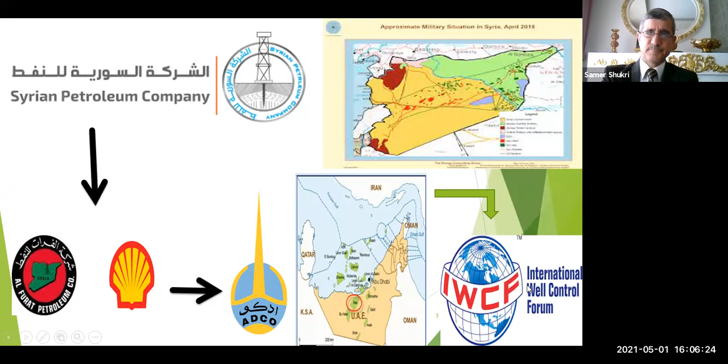Here is the map of UAE, Emirates. I worked here in this circle, Bab Field, Habshan. Then I moved to training, and I am accredited and authorized from the IWCF forum. Here are my certificates as an international trainer, passed, and here also is my result. All are excellent, strong pass.

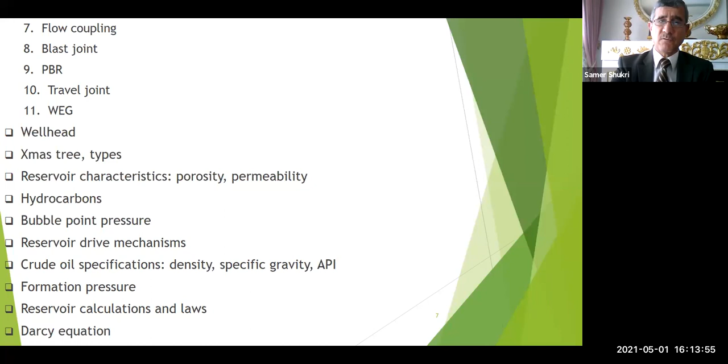So we'll go also to reservoir drive mechanisms. This is reservoir engineering, crude oil specifications. We will go to density, specific gravity, API, formation pressure - I think most of you know what I am talking about. The reservoir calculations and laws, Darcy equation, all of these you are brilliant in, I think. Then initial oil in place, how to calculate the reservoir volume, how much oil is in it, how much fluid we have in it, and the saturation.

We have Boyle's law also, for the gas: P1V1 equals P2V2. I think most of you know this law. Production stage, we will go to well classifications, gas lift system, oil types, well intervention.

So we'll talk about wireline and coil tubing. Then with coil tubing we can do well stimulation, which has types: acidization, fracturing, hydraulic fracturing. We can go to productivity index also.

Then well kill method - this is very important for the IWCF, well control. So if you need to kill the well, you have to be fantastic in these four methods. I will explain all of them to you in detail.

Then we can go to cement plug using coil tubing, well logging - this is a big subject, open hole logs and cased hole logs. Then noise log. I will explain to you also working in H2S environment.

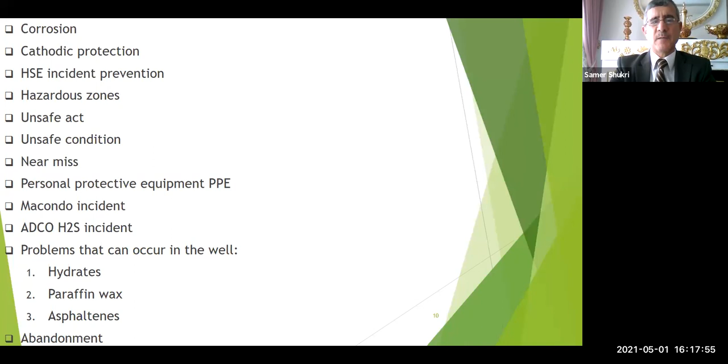Then problems that can occur in the well - we can take hydrates, paraffin wax, asphaltenes, then abandonment. Let's move on to the details of this session, of this small course.

We can say that we have oil in this area. We suspect that there is oil in this area. So how can we identify, how can we prove that this oil will be here? I think you have some idea, but I will go into detail to save some of our time.

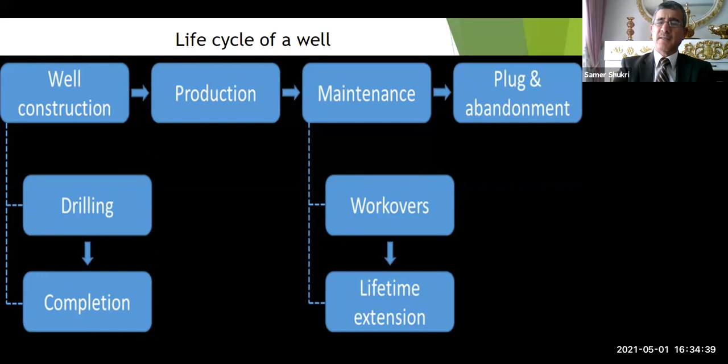Here we can take this: the life cycle of a well. Starting with construction, drilling and preparation take about 18 months, 1.5 years. Then the drilling itself takes 2 to 3 weeks, maybe 1 month, maybe 2 months. It depends on the geological conditions encountered and the depth of the well. If we drill 15,000 feet it will be different than if we drill 2,000 or 3,000 feet. If it is vertical it will be different than if it is horizontal, and so on.

Then we do the preparation. After the rig moves, we do the preparation, or if the rig is already on site. But for the time being, we release the rig. It will run the completion, and we come and do this stage: clean out, stimulation, perforation, frac, logging, all of this after running the completion by the drilling rig. After that, we do the production.

As I told you, production will last 20 or 30 years, plus or minus. It may be 10 years, maybe 5 years. After that we need a workover to come and isolate this producing zone and move to another zone, or do a side track, or convert the vertical well into a horizontal well, and so on. So every well will be different from the other well, and every field will be different from the other field.

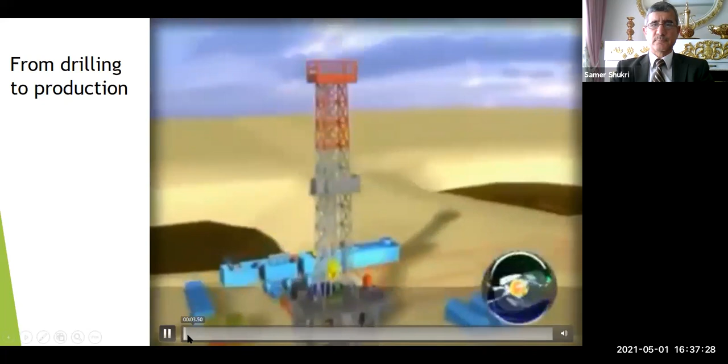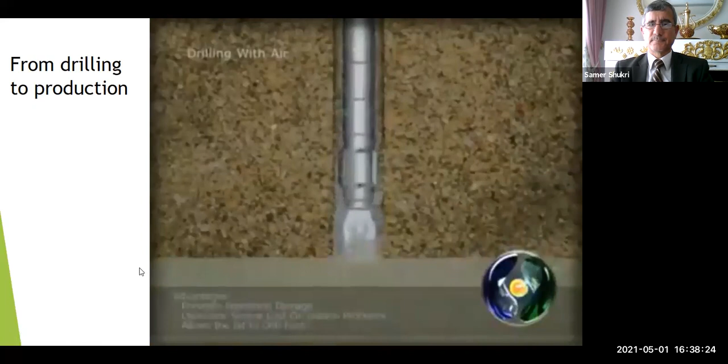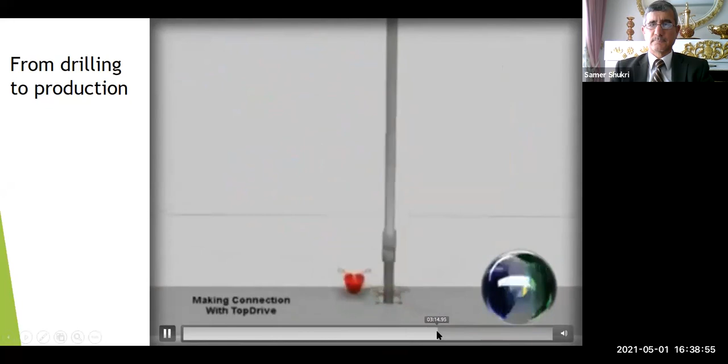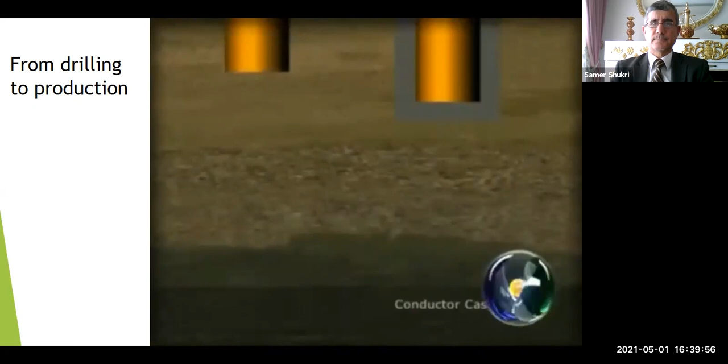Here is the drilling phase. Here is the drilling. The drilling system here. Here we have the drilling. We're running the completion; we run the completion after completing drilling. The stage of the drilling. The perforation. The operation. And completion. This is in summary.

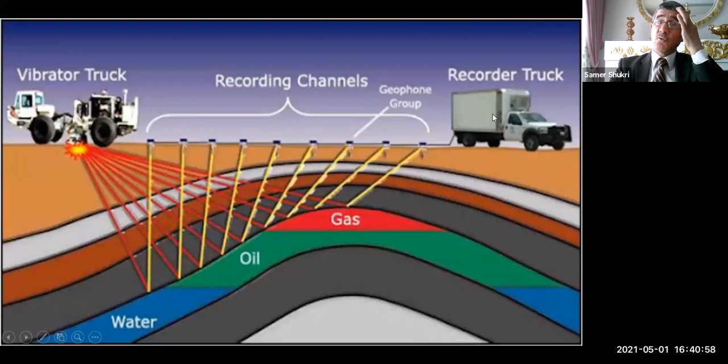Here are the geophones, and here a geophone group, and here the recorder truck. It will go to the computer, then it will be interpreted.

Here also in the sea, the survey ship considers this length of water from the sea level to sea bed. Say 800 meters, for example, then they will send the waves, source of shock waves, air gun. Then it will reflect from the surfaces of the layers, like this.

Here, I can give you an idea about IWCF. Everyone who needs to work in the oil field should be qualified and competent to work, and should have a high awareness regarding well control.

So we have two types, drilling and well intervention. Drilling is a different section, they study the drilling subjects. For us, in well intervention, we cover completion equipment, completion operation, wireline operation, coiled tubing operation, and snubbing operation.

And we have 4 levels: level 1, 2, 3, 4. Level 4 is the highest for engineers and supervisors. This level is for operators. Then here is introductory, and here is awareness.

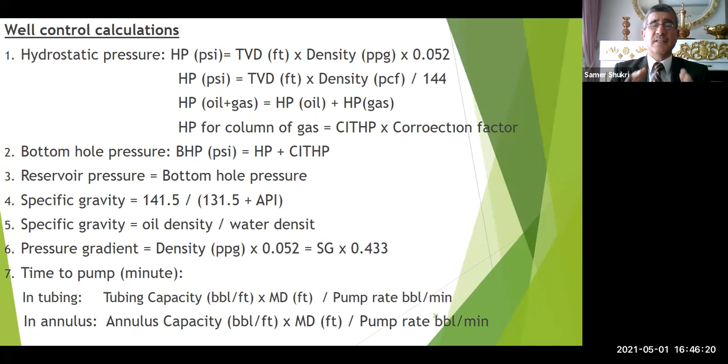So IWCF is not easy, and at the same time, it is not difficult. But you have to know the subjects that are delivered to you. So if you are willing to learn, you can learn.

Here, drilling rigs, we have 5 types of drilling rigs. We have one for land, or we call it onshore rigs, and the other type is offshore rigs. It depends, from jack-up rig to semi-submersible rig to drilling barge to drill ship. Now you will ask me, what is the difference between jack-up and semi-submersible and drilling barge and drilling ship? All of them are rigs.

So here we can drill in shallow water, maybe 200 feet, 400 feet, like this. But here we can go to 500 feet till surface. So this one is from surface to seabed, sea level to seabed, 500 feet maximum for jack-up. For drilling barge, it may be up to 100 feet, shallow water, 100 feet, 50 feet, like this.

Then if you go deeper in the water, the difference between sea level and seabed, that will be semi-submersible, up to 10,000 feet. Then drill ship - we have in Turkey here, we drill in the Black Sea and White Sea.

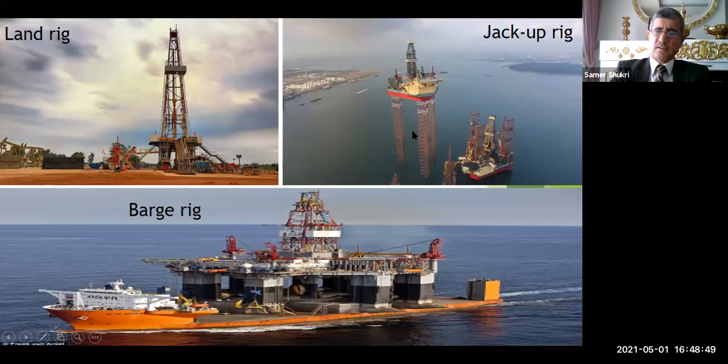Then semi-submersible, this is when the seabed is far away from the sea level, by up to 10,000 feet, this one. Then drill ship, as I told you, this is...

Yavuz drill ship, it is drilling in the Black Sea, in Turkish waters. The other one is Fatih drill ship. It is drilling till 12,000 feet for the distance of the seabed and sea level.

Here we are working in a very dangerous industry. Guys, please pay attention with me. We are not going to a party, or to the theater, or to a playground to watch a football game. We are dealing with the most dangerous industry in the world. So you have to be aware of it, and you have to train yourself to study and see what will happen if something goes wrong.

If you see these incidents, you will count till 10 before you go to the next step. I will show it, not to make you frightened, but to increase your awareness and make you more practical, because these happened with most of the people who work in the oil field. Look at it, please.

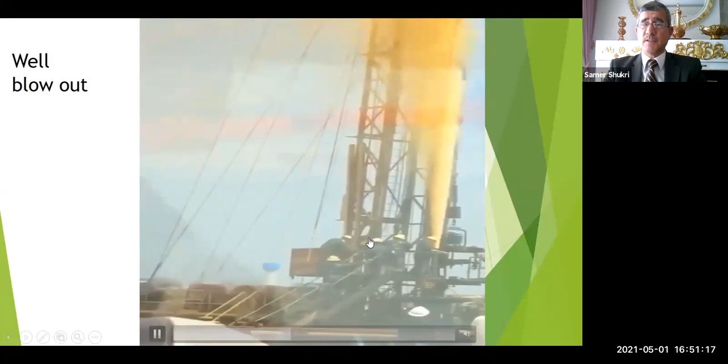So they are trying to fix it, but it is difficult, but at the end, they have to fix it. Otherwise, it will escalate and maybe a disaster will happen.

You see, they connect this one. At the top of it, there is a valve here. This tube, this pipe, they connect it with difficulty. You see?

After that, they run it and close the valve and secure the well, kill it. You see? It is not easy at all. We call it a well blowout.

You see, up here, they install a valve. When lowering the tubing down, they will close the valve and secure the well. After that, they can kill it.

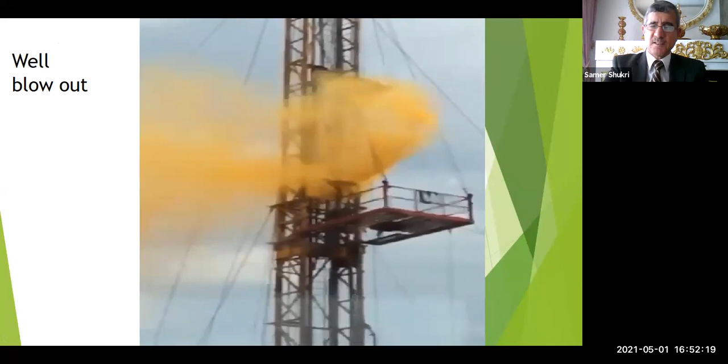So if there is H2S here, it will kill everybody on the site. It will not stop. Here also, the rig. You saw the rig without fire. Now I will show you the rig with fire.

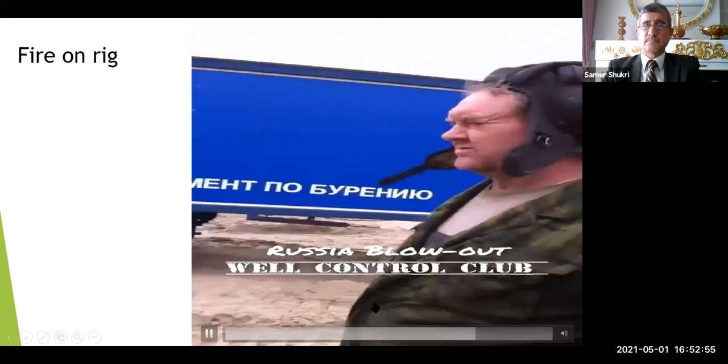Very dangerous, you see the pipes, drill pipes also, they fell down. This is in Russia, Russia blowout. What can they do? Can you help them? The rig has gone, the rig has gone.

Another one, you see this one, this is similar to the previous one. Also a blowout. I will pass it.

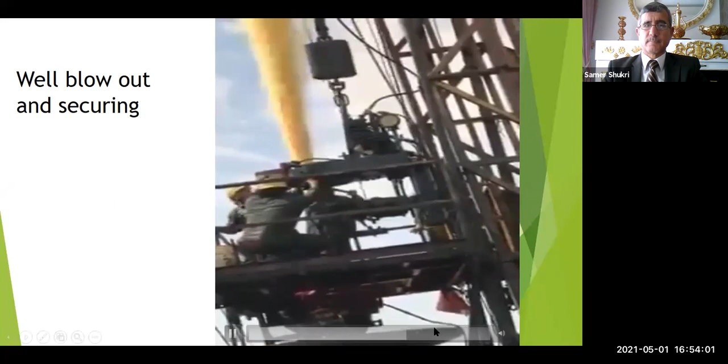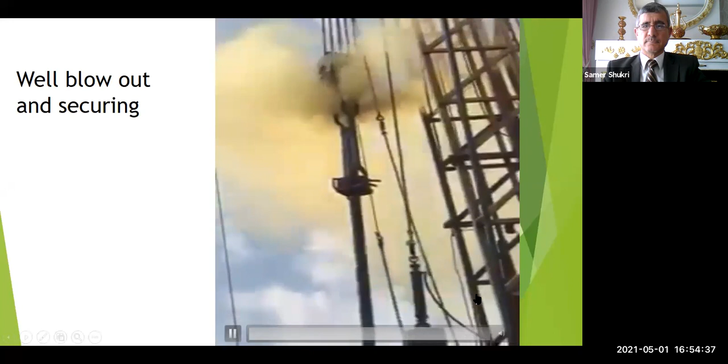Same as the previous one. They connected this pipe and they will lower it down. Then you close this valve, secure the well.

Next, also this one, working without killing the well. Look at it, it is very dangerous.

They are pulling the completion while the well is flowing, not killing it. Here in IWCF, they will kill you. They will not allow you to work anywhere in the world. This is breaking all rules, this is breaking all standards. So it is not allowed like this one.

So you have to calculate the kill fluid, you have to kill the well as per procedure, so you have to be responsible. These ones can die at any time, at any minute. Look at them, how can you go there for $500 with no guarantee? No, nobody can go there.

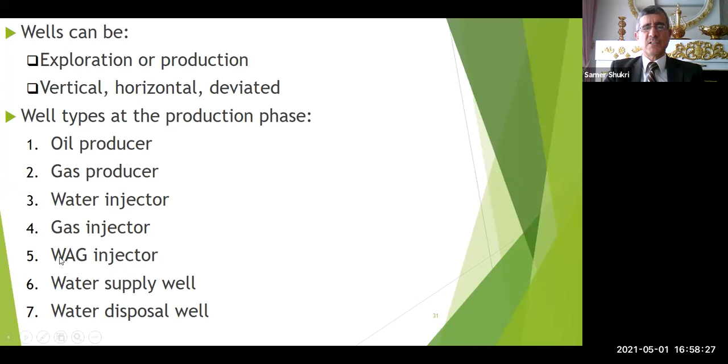So because, by time, after 10 or 20 years, if there is a problem in this completion, we can move in a workover rig and replace it easily. But if the casing is corroded or damaged, how can you replace it?

It is fixed with cement, the cement is fixing it behind it. So in this case, you will not be able to do anything, or you have to spend more time to either repair the casing if it's corroded or leaking water, or similar issues.

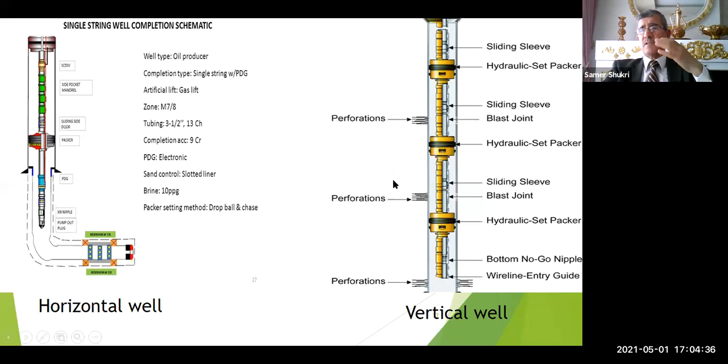And here are the components, you see them? We can take them one by one, and I will give you all these components. If you know most of these, you will gain another 10% on the IWCF, so by the end of the session, you will pass it very easily.

Here we have types of pumping. When the reservoir cannot sustain natural flow, what can we do? We have to use artificial lift. We have four types of artificial lift.

We can start with the gas lift system. We inject gas into the annulus to the side pocket mandrel. Here we have a gas lift valve and produce it to the surface. When there is no liquid here, no oil and water in this section, it will close. Then the other gas lift valve will open and produce this one, and so on. It will be repeated like this.

When we have no production at surface, we stop injecting gas and wait till the reservoir builds up, and then we can resume gas injection. Otherwise, if we're still producing using the gas injection through the annulus to the tubing, we continue gas injection. Or if we don't produce, we can stop.

The other type will be here: we have ESP, electrical submersible pump. When we have a reservoir that has high water cut, when the percentage of water is, say, 80%, 70%, 90%, or 95%, and the reservoir can deliver high rate, we cannot run ESP when the well can produce 1,000 barrel or 500 barrel, because it will produce net only 10 or 20 barrel. It is not economic. While if this well reservoir can deliver 10,000 barrel per day, for example, if the BS&W is 80%, how many barrels will produce?

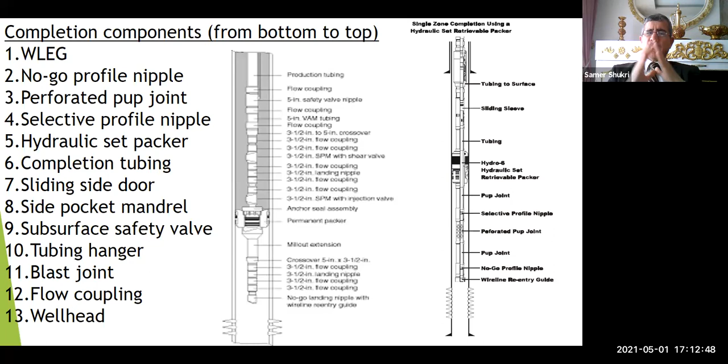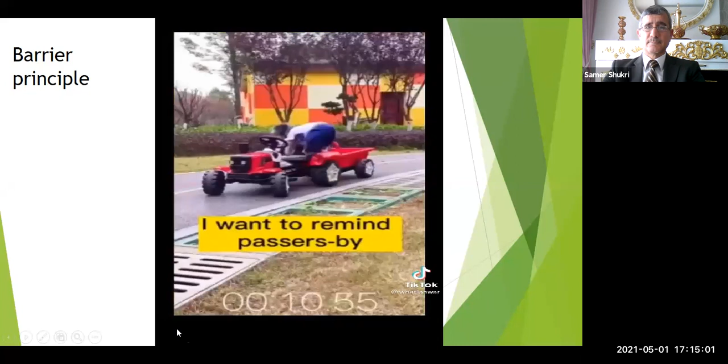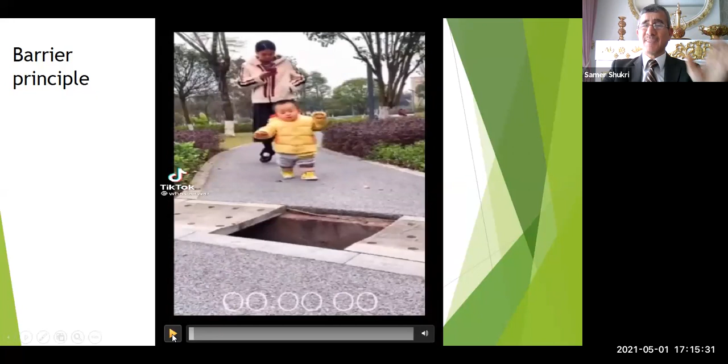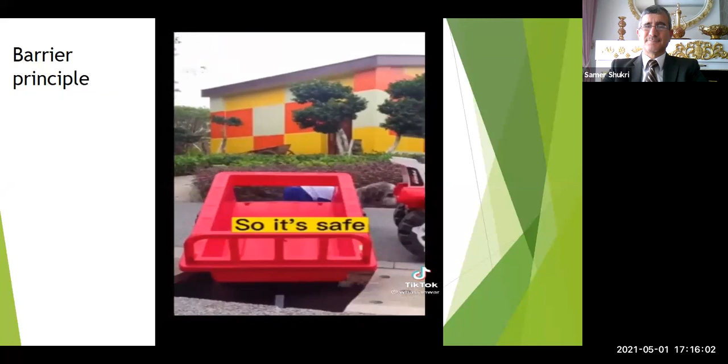He put this barrier to prevent anybody from dropping in the pit. Very clever guy. This is called the barrier principle.

This subsurface safety valve is used to close the well in case of an emergency, and it has two types: surface-controlled and subsurface-controlled. These valves, if there is any fire or damage in the Christmas tree or flow line at surface, will close the well automatically by releasing the pressure, or releasing the hydraulic pressure in the control line. So they can close the well in case of an emergency, this one.

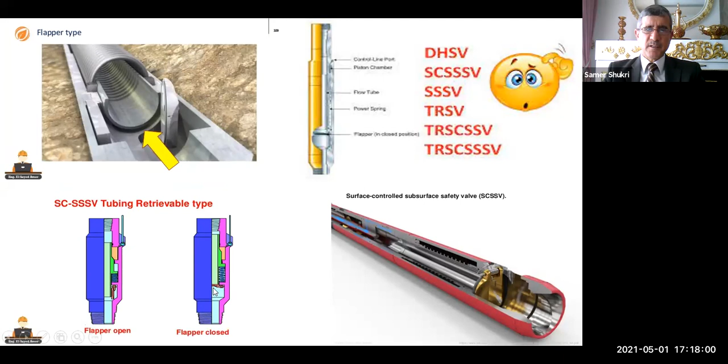This is the subsurface safety valve. We have types: wireline retrievable and tubing retrievable. This is the safety valve, it has a flapper. This is open, you see, and this is closed. This flapper is closed. This is open. We can call it downhole safety valve, surface-controlled subsurface safety valve, subsurface safety valve, tubing retrievable safety valve, different names for the same element. Here the flapper, you see it, flapper open. This flapper is closed, the well is closed, the safety valve is closed. You see this one, we saw it.

So if you work as per procedure, I'm telling you international procedure standards. But if your company is not taking care, in this case you have to expect more incidents, more losing of money, of people, and also damage to the environment.

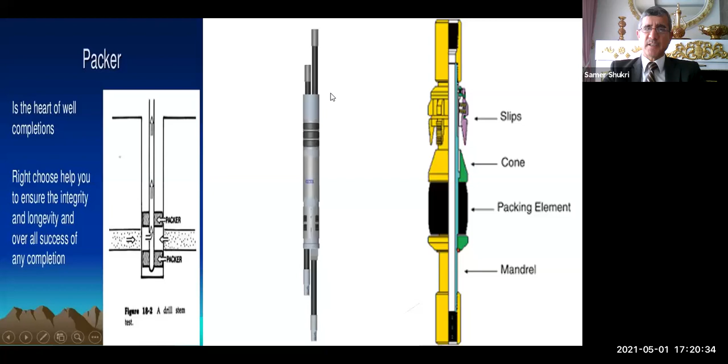Landing nipple: we have the no-go landing nipple, run at the end of the completion, we have only one piece. Selective landing nipples, we can run 3 or 4 or 2 or whatever we need for isolation, for setting plugs, for testing, and the safety valve nipple.

Sometimes the tubing safety valve will get damaged or get stuck. What will happen? We isolate it using a locking cam and keep it open all the time, and run inside it the wireline retrievable valve. Where shall we set it? In this safety valve landing nipple.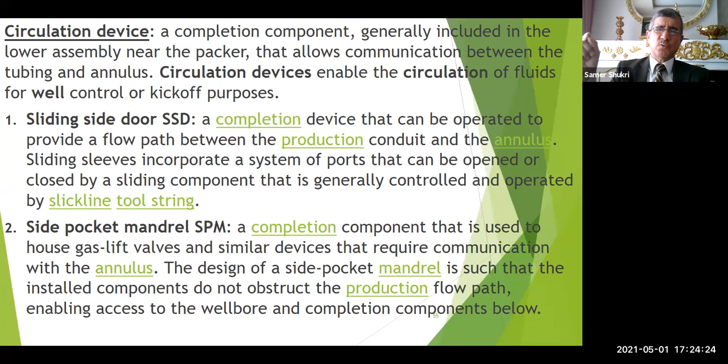Here is the kick-over tool, used when we run or pull the gas lift valve in the side pocket mandrel. This is the side pocket mandrel, which we run here. There is a place for the different types of gas lift valves. We run it using the kick-over tool, this one. It has an arm that moves, placing the actual valve in its place.

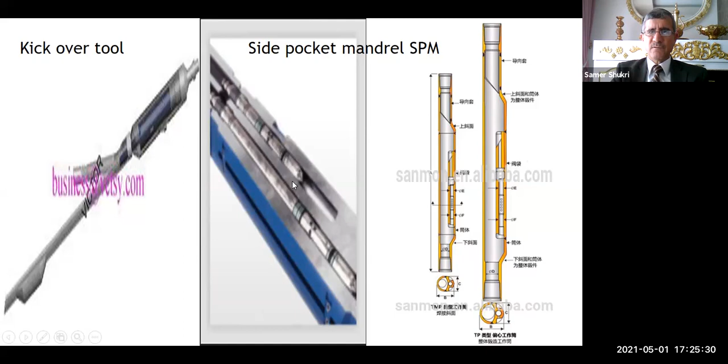We have flow couplings and blast joints. When we have experience that there is corrosion or erosion in the well, we run a flow coupling or blast joint. This flow coupling has an OD more than the OD of the tubing normally.

The ID is the same as the ID of the tubing. Why? Because, as you know, we have two types of flow: laminar flow and turbulent flow. When we have laminar flow, there is no problem; the well will flow by itself.

While when we expect turbulent flow and a high possibility of erosion to happen, for example at the X nipple or R nipple, we run either upstream and downstream of it, or only downstream of this completion component, for example the subsurface safety valve nipple. So we run downstream of it, otherwise we run upstream and downstream. Upstream means below it, and downstream means after it. So in this case we protect these jewels.

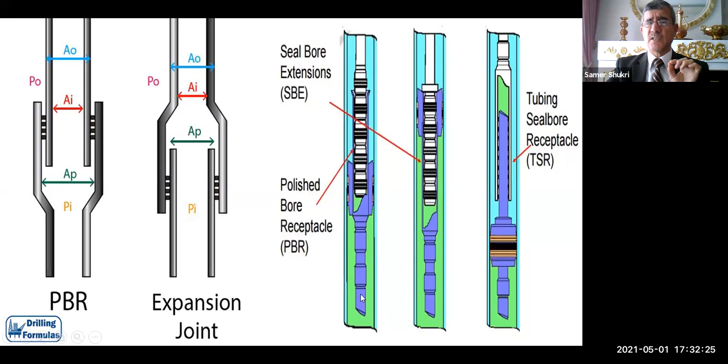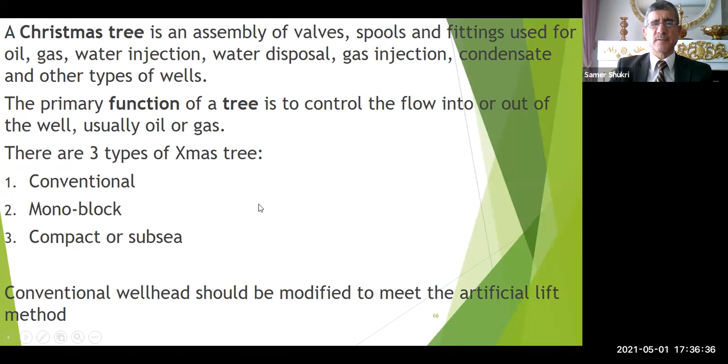Even if you don't want to work in the oil field, if you go on a site visit to any well and the production engineer explains to you, you have to know better than him because you studied and attended this course. So if you don't memorize them, it will not be okay. Memorize them. Here also mono-block, one piece, and here also the well.

These are for subsea. We have two types: vertical and horizontal. You see, like this, remotely controlled. From the surface we have control, or they can send a machine to control it. Sometimes they send a diver, so they can control these wellheads and Christmas trees.

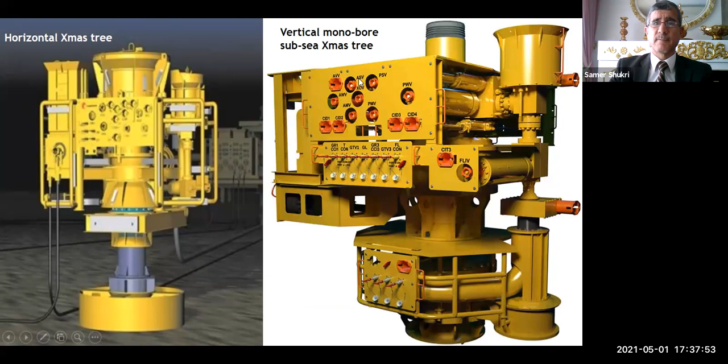Using the electrical current. Now, origin of oil and reservoir. Most of us have studied the origin of oil, and it came from the decay of plants and animals under pressure and temperature in the sedimentary rocks, taking maybe 10 million years, plus or minus. After that, they were compressed, and under pressure and temperature they moved from one condition to another. This is called source rocks.

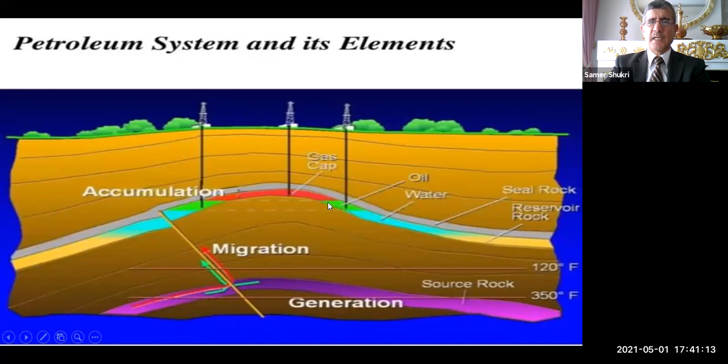So if we drill a well here and inject water, it will keep sweeping the oil and gas and keep the well flowing. This is a perfect reservoir. You cannot find it like this in reality, it is in the computer only.

So you can find it here: gas in the top, then oil because it has higher density, then water, which has the highest density in the fluid. I want to tell you about the difference between fluid and liquid. Liquid is oil and water, it is not gas, so we call it liquid. Meanwhile, we call gas, oil, and water fluid, so we call them reservoir fluids. So you have to differentiate between liquid and fluid. Gas is fluid. Water is fluid and liquid.

Here also, this is source rock, reservoir rock, and here in the top we have cap rock. Here we drill an oil well, we produce from this, the upper part is gas, the lower part is water. We can drill in the same structure maybe 10 or 100 wells, there is no problem, and we have patterns to drill.

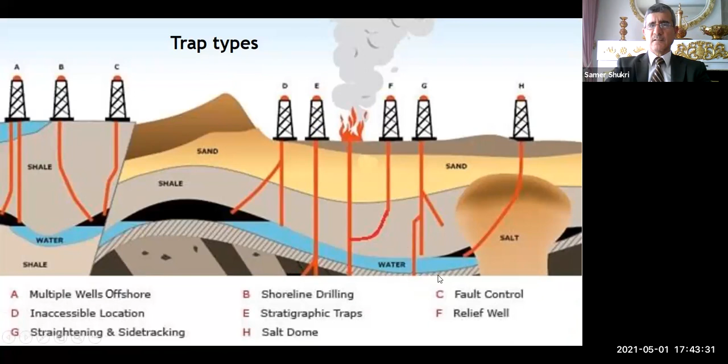Here also the types of the traps, you see it, you can see it.

Reservoir characteristics: we can talk about the porosity, which is the reservoir voids, the spaces. The total volume of the voids divided by the total volume of the rock, including the bulk volume, is called porosity. It varies from field to field, in general from 5 to 40 percent. It is the percentage between V pore, the volume of the pore, to the volume of the bulk. So this is called porosity.

What is the difference between permeability and porosity? The permeability is the ability of the rock to flow the fluid. If it has high permeability, then the fluid will pass easily through this rock, so we take advantage and use it for more production.

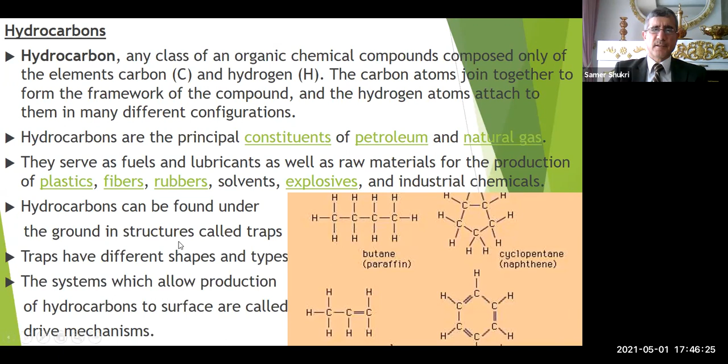Hydrocarbons can be found underground in the structure of methane, ethane, propane, until we call it CxHy. Cx, for example CH4, C2H6, C3H8, and so on.

So if we leave the gas to settle down alone without producing the oil with it, what will happen? It will just produce gas, and this gas is not as expensive as oil. We need oil, so we have to keep it.

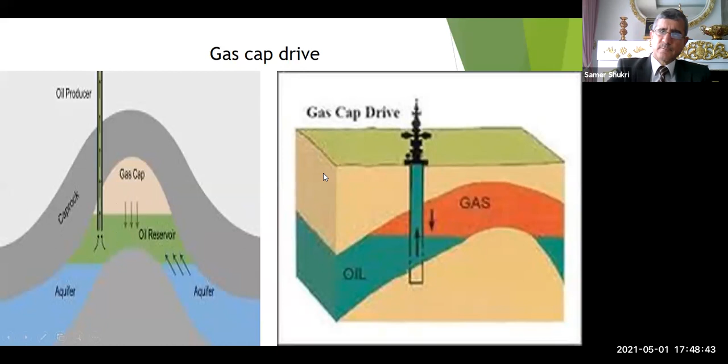Gas cap drive: here we have the gas cap separate. The gas cap will compress on the oil and leave it to produce through the well. You see it like this, gas cap.

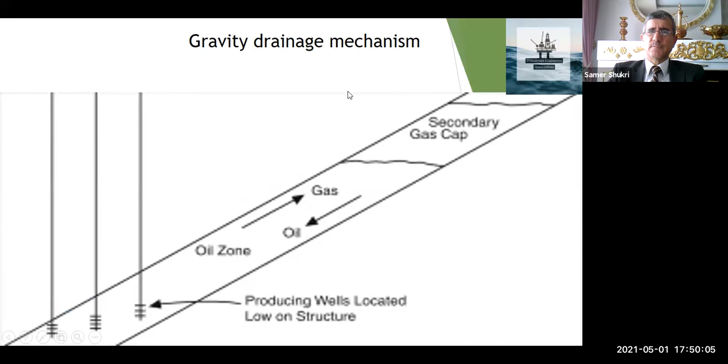API is also the density of the fluid, introduced by the American Petroleum Institute. As it is higher, it will be better, and the gravity will be less, so it will be better and we can sell it at a better price. The API of fresh water is 10.

If it is heavier, it is heavy oil, or heavy water like salt water, which has API less than 10. While if we have more than 10 API, it is for oil. So if we have a very good oil, it will be API 40 plus, like 40, 45, 46, 43. Below that is normal oil.

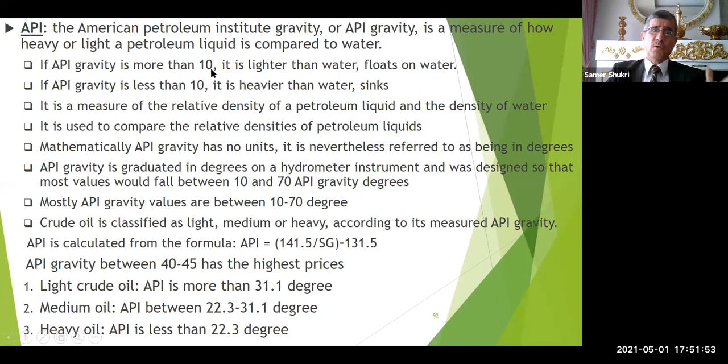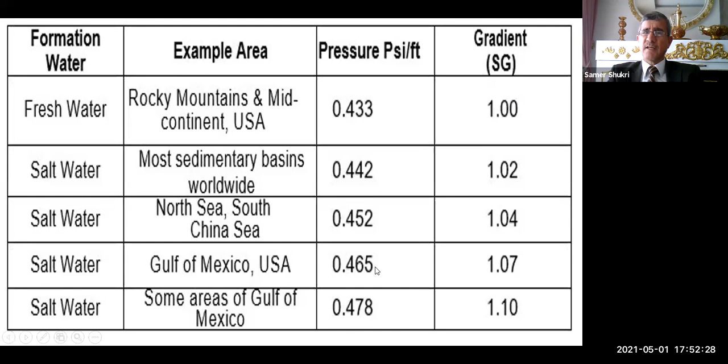Formation pressure, we talked about it: we have normal pressure, abnormal, and subnormal pressure. Let's discuss them in detail. Normal pressure formation water, fresh water, has a pressure gradient of 0.433 psi per foot. This is standard for us, and the specific gravity is 1. There are heavier fluids, but this is our reference.

Initial oil in place: here we have the equation to calculate how much volume of oil, original or initial oil in place, there is. This equation can give me the original oil in place using a constant, the area in acres of the reservoir, the thickness in feet, the porosity which has no unit, the water saturation (average water saturation), and at the end the formation volume factor, BO. All of these let us calculate how much oil is there.

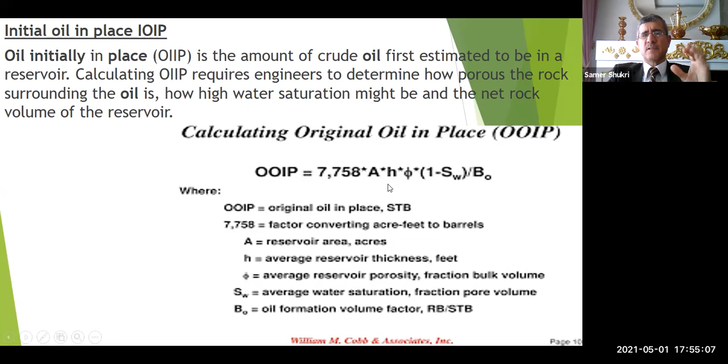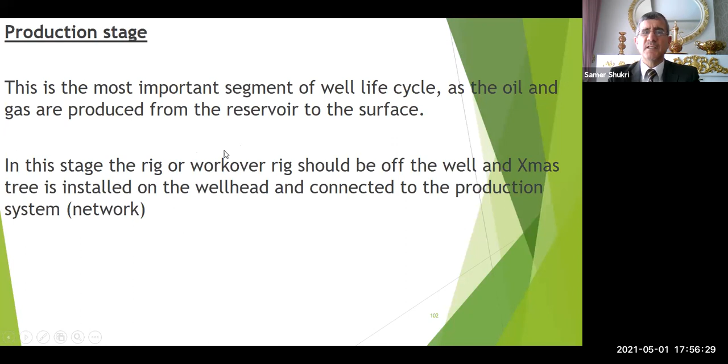Production stage. We come now to production stage. After we put the well through completion, drilling, perforation, logging, all of these, we have to produce the well and start counting money resulting from this well.

So we have the well, and it flows to the station. Here we can separate the gas from oil from water, and water is sent and injected into a water injector well. Gas is sent to the gas plant for treatment, and oil will be treated. After that, it will be exported.

Here we have a classification of wells as per production method. We have primary, secondary, and tertiary. Primary is when we produce the well without any support, without any help.

But if we start injecting water and gas, in this case we call it secondary. We have different types of this secondary for mechanical lift that can help the well to produce. We took them: gas lift and pumping.

Gas lift, I explained to you. For pumping, we have ESP, beam pump, PCP, and jet pump.

For tertiary, we call it enhanced oil recovery, EOR. It is called EOR, tertiary production. We have too many methods for that. We can pump polymer, we can pump chemical, heat, carbon dioxide, explosions, different types.

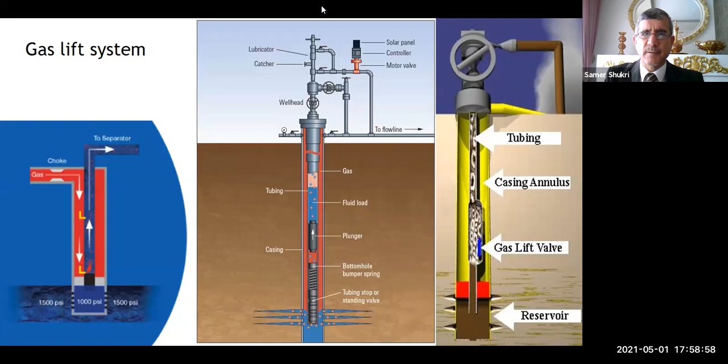We have the beam pump. I will show you the beam pump actually, because you see it on television always, or it is famous maybe in some countries because it is a secondary production method. So I will show you.

Now you can look at this one. Can you count how many wells are producing here? Very nice scene, I think. You see, I think this is in the US.

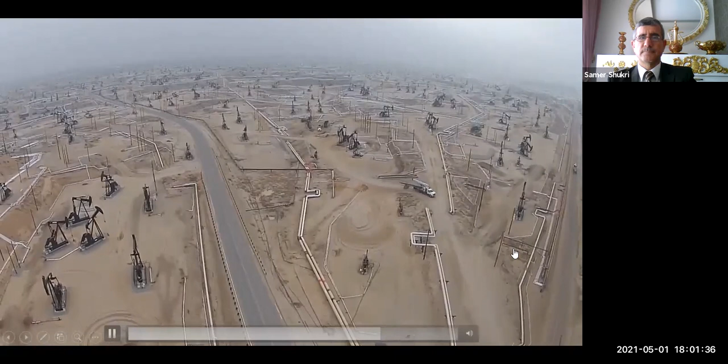All of these are beam pump wells. The flow lines here also, but very wide, very big field. I think it is in Texas. This is heavy oil, we call it.

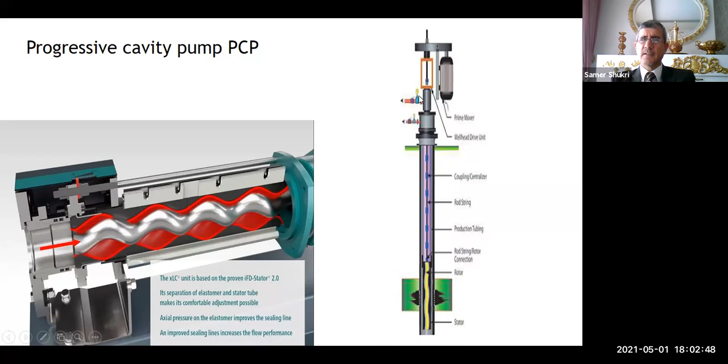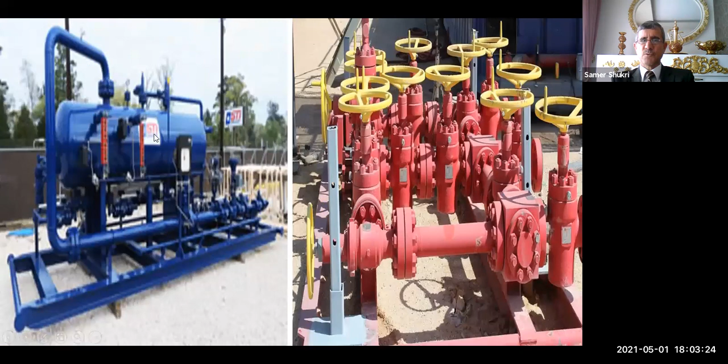You see here test separator, test package. We have test separator, choke manifold. This is test separator. Crude oil also.

We have 3 types of crude oil. West Texas Intermediate, you see it on TV always, every day. This is the benchmark of oil. We have Brent, and we have Dubai crude, and other types, but these are the most famous types of oil.

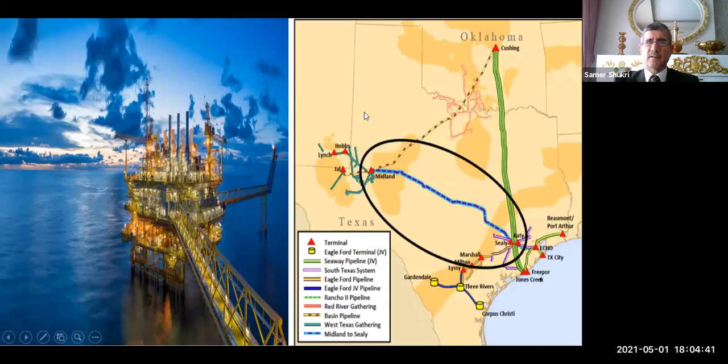Reservoir monitoring, we do surveys, same as what we talked about with the human body - pressure, temperature, the pulse, the blood analysis, all of these. But here we call it bottom hole closed-in pressure survey, bottom hole flowing pressure survey, pressure fall-off survey, pressure build-up survey, interference test between two wells, integrity test, capacity test, modified isochronous. So all of these we can do and interpret, then take action.

You see these well intervention tools, it has slick line and coil tubing. This is the slick line.

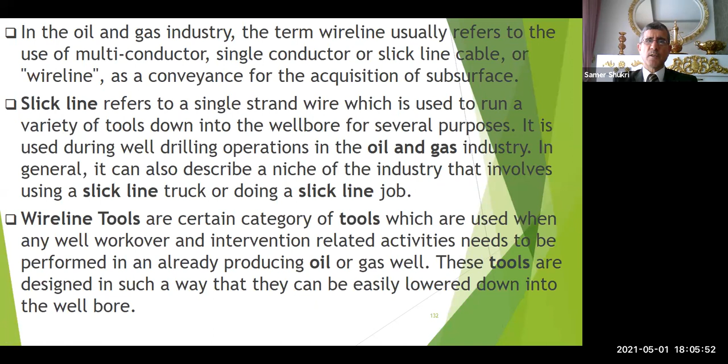In general, I will hurry up a little bit because we passed the 2 hours now, and we will finish within 5 minutes. So this is the slick line, and it has types, 3 types. The wire line has 3 types: slick line, braided line, and electric line. Each one has different specifications and different functions.

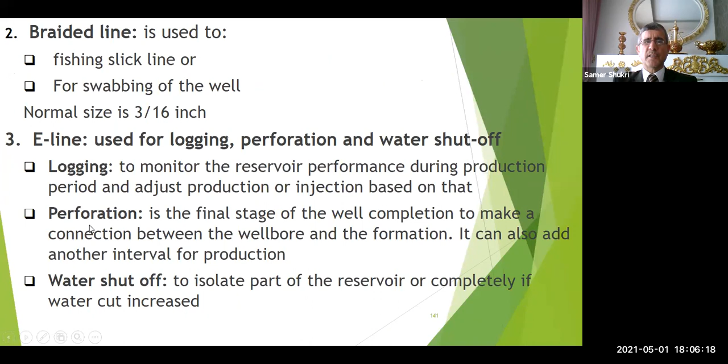For electric line, we can do logging, perforation, and water shutoff. Perforation, you know it - you can perforate the casing to allow fluids to produce from the reservoir to the well, and from the well to the surface.

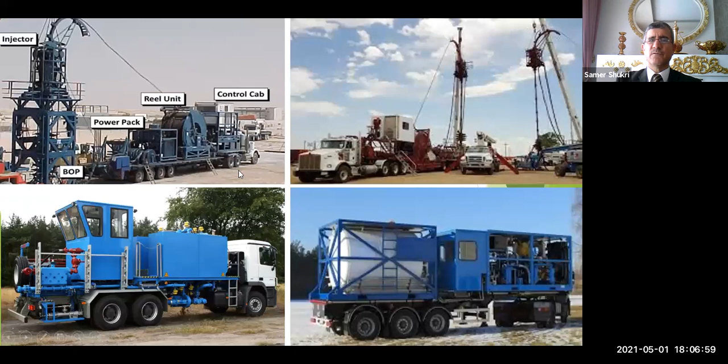Here, coil tubing. We can do a session for coil tubing if you want. You see, this is coil tubing. It is a metal pipe, with OD 1.5 inch, 1 3/4 inch, and 2 inch. There is less and there is more, as we like to run, it depends on the situation.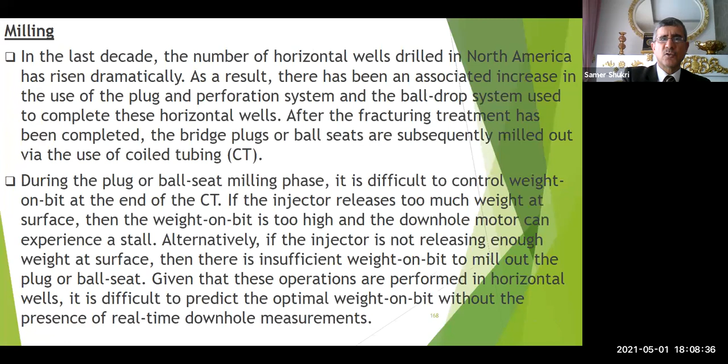Sand clean out also, and scale. We clean it using coil tubing, milling, fishing, pumping. Also, we have different types.

Workover - this is the workover. I was working with a workover like this for 4 years at the first company I worked for. This one also, but I see it dirty, maybe covered with oil. So sometimes you are working and the oil starts to flow, and it can cover the whole rig. When we finished this operation, we were moving the rig to the workshop to clean it and send it to another one.

Well kill methods, it needs also more explanation, different types. Well logging, we have also 2 types - cased hole and open hole log.

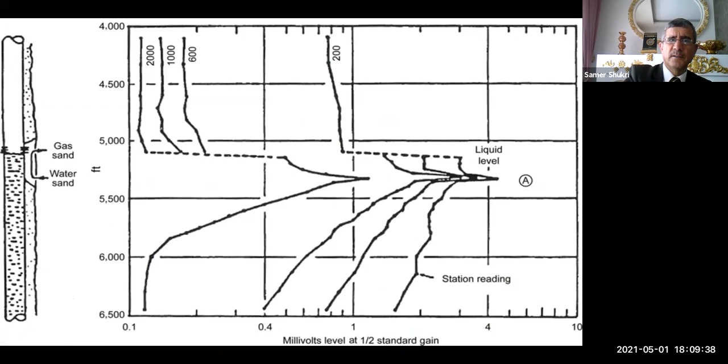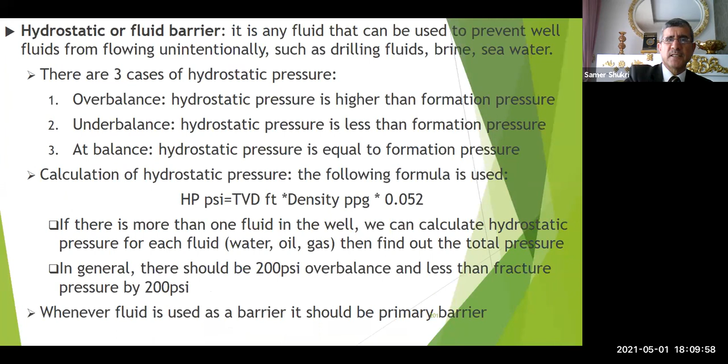Working in H2S environment, NORM, hazard and risk assessment matrix, this one, permit to work, skin factor and formation damage, barrier theory - I showed you the video also - hydrostatic and mechanical barriers, 2 types: mechanical barrier and hydrostatic.

Classification of barriers also - these, we have BOP, stuffing box, we have also grease injection head, stripper, all of these. Well integrity management system also.

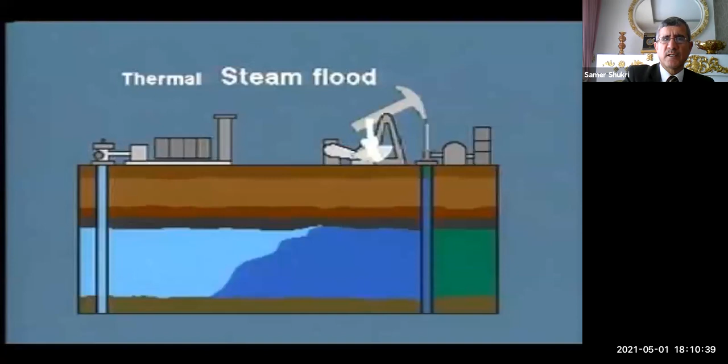Well, this is well life cycle depending on well integrity. Well pressure envelope, this one. Also oil production phases - I will stop here just to show you the slides. I will not talk. CO2 injection.

Safety, here is safety.

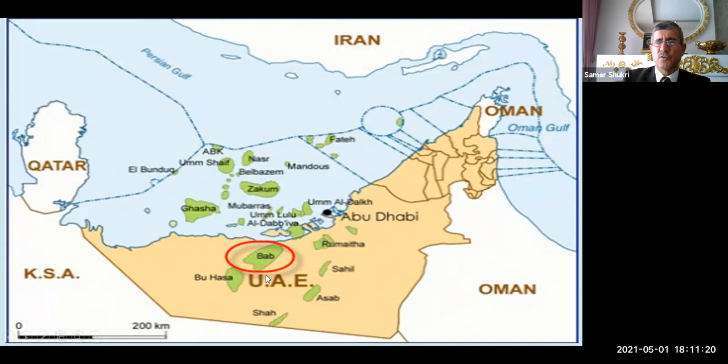Problems that can occur in the wells: scale. We have hydrates, we have also asphaltene, paraffin, wax. All of these can obstruct the flow of the well.

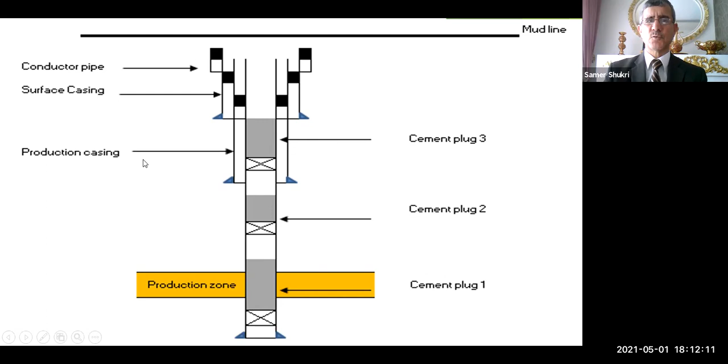Abandonment: when we want to close the well so it will not produce anything, we can close it and it will be like this. We put a cement plug, it could be 200 feet, this one and this one. We set before it MPBT, we call it a plug, and above it we pump cement using coiled tubing. Here, three plugs to isolate it. The last one, the well will be like this. It is dead, may Allah have mercy on it. So this is the hole.

We can go to this first one. Till here, I think exactly 2 hours, we finished our session.

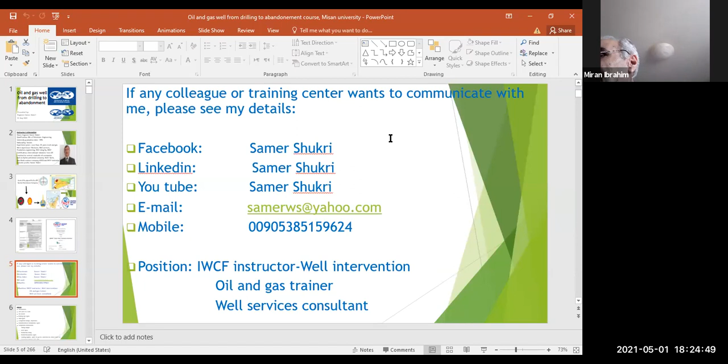Yeah, my boss, this is my boss 25 years ago. We were colleagues, Mr. Samer. So thanks, it's a good and useful lecture, and the subject is very interesting. Thank you, I'm proud of you. Really, I'm proud of you that we worked together, I think, more than 7 years. Thank you. I appreciate you, you were supporting me all the way. I started working as a workover supervisor, and you had experience for more than 15 years. So I was proud that you were a good supporter for me. Again, I appreciate it.

You worked on the rig Cardwell, I think. Yes, yes, Cardwell rig, yes. Cardwell 10, Number 8. Yes. You moved me more than 25 years ago. Now you moved me behind, we are still young. Thank you, Mr. Samer. Thank you, boss. Thank you, Mr. Ibrahim. Thank you.